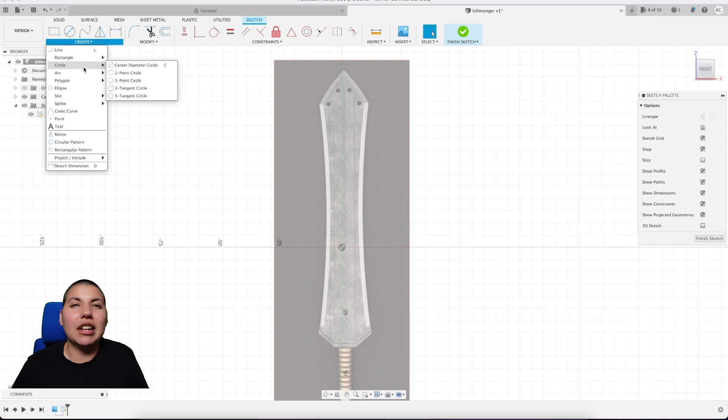For this blade, I'm going to first outline it using an arc, like a 3-point arc or 3-point circle. You can use a spline if you want, it's up to you. I'm only going to do one side, meaning literally 1/4 of it, because I can mirror that side and then mirror the back of it, so that's a lot less work.

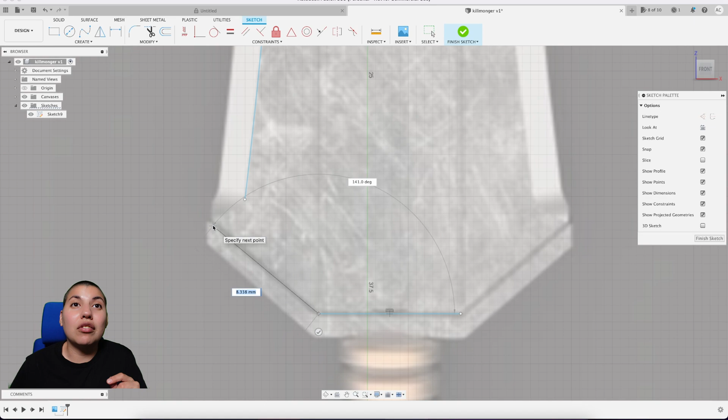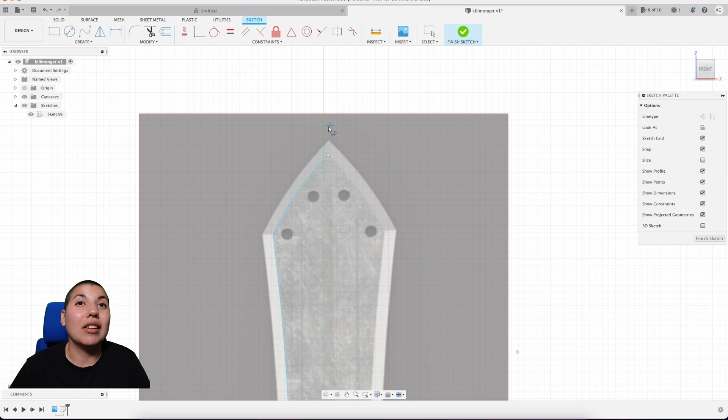Here we're going to be outlining the bottom handle, and if you notice, there's a curvature on the edge of the sword. There's a lot of ways to do it, but for these 2 points, I used the coincident tool, and it took a while to get those points together. To avoid that, you could just have the lines connect like a normal person. I also do a line in between because I like to know where my midway point is, and I need this to be a closed polygon in order to extrude it.

Those edges you see on the sword can be done multiple ways. I'm going to be doing it with drafting, but I'll have a link of another video where the guy used the spline tool or sweeping tool, and it was really cool how he did it, so that'll be in the description. So now we have the polygon done, and it's enclosed.

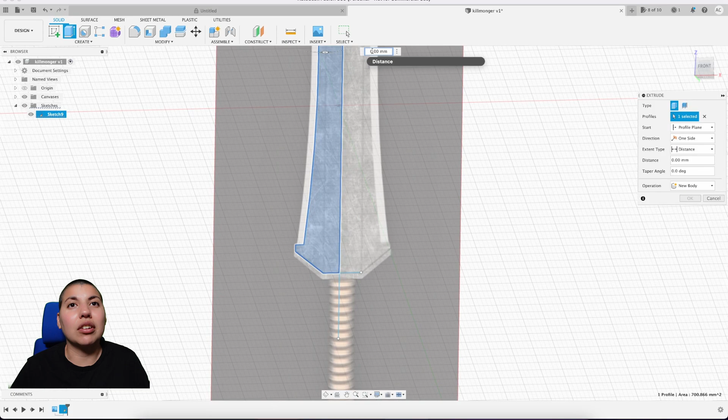Now I'm just going to extrude it, only by one side because that's all that's needed, since I'll be mirroring every single step. Then we're going to draft so I can get that edgy look. Luckily this sword isn't like my previous sword where the whole thing was kind of domey, so I can simply use the draft method on this, and that's pretty neat.

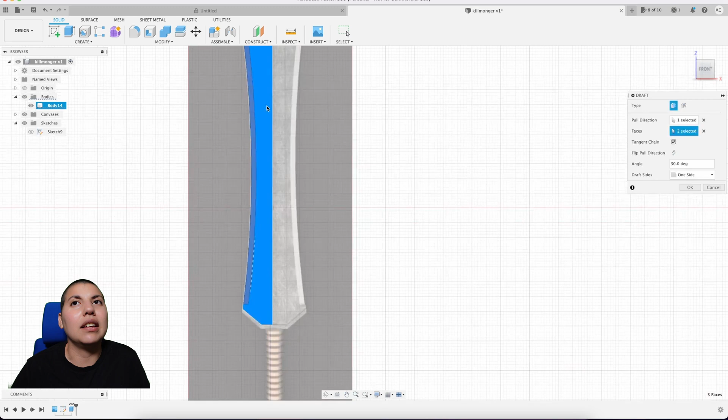Now that that's done, we're going to get into a bit of a tricky part, but to show my mirroring concept, I'm just going to do it now, and voila. See, that's how the front would be done, and then you would just do the back plane for the back side, because mirroring just makes life so much easier.

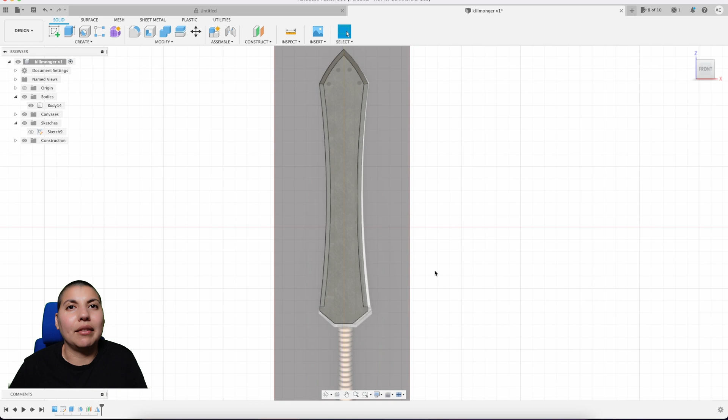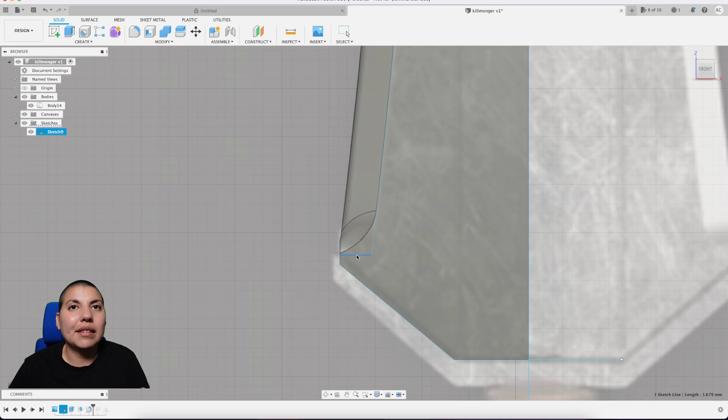So the next step, I thought of a lot of ways of doing this, and to me, doing a fillet was the easiest way. It goes down to whether it's perfectly curved, or like a weird curvy angle. So it's kind of really subjective.

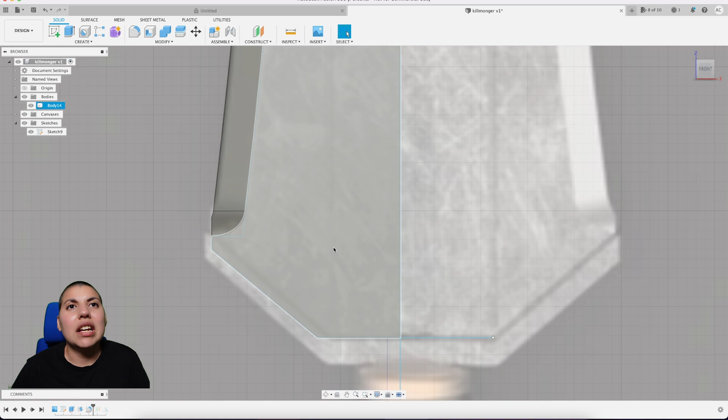I couldn't really find a good picture of this angle of the sword, so I just did a fillet to give it that look. But like I said, I'll have a link down below of a video of how another guy did it, using I believe a sweeping tool, and he cut it, and it was really cool.

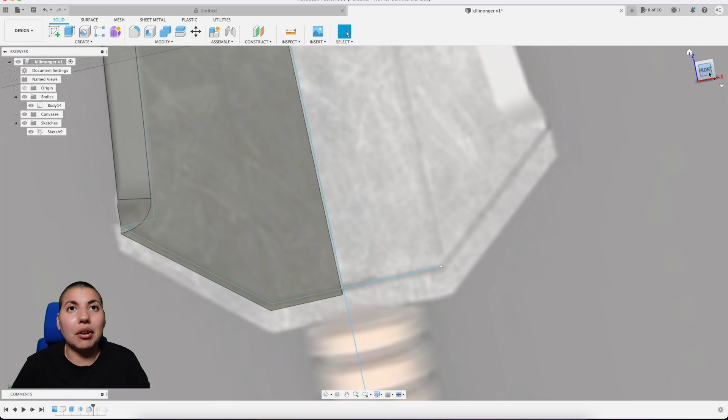I liked it. I was originally doing it like that before, so here it's really hard, like I said, with the details, because I didn't really have the sword, so it was a bit difficult. I didn't have a good image, and I like to see things from the side because I have like weird paranoia - if I do something and change the angle, it's going to look weird.

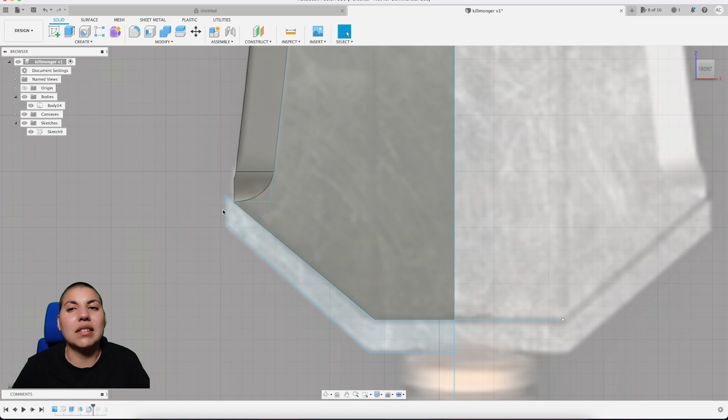Now here we're going to do the outline for the extended handle part of the sword, and then just create some lines. I usually like to do extend when there's a gap between two lines, because sometimes if I do parallel or whatever, it messes up the form. So if I just hit extend, it's going to touch it perfectly, and it solves my problem, so I don't have to worry about doing a line incorrectly.

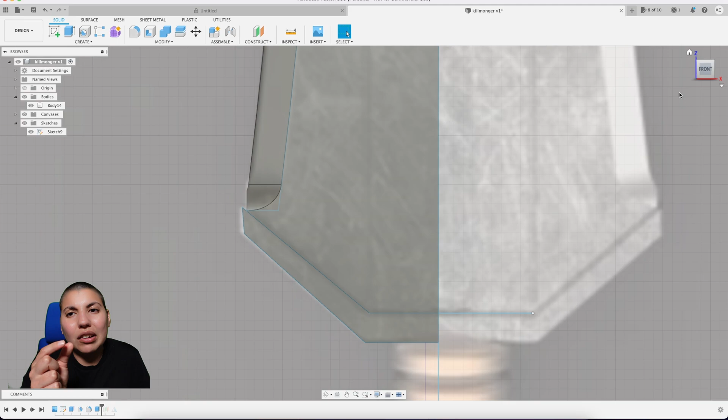After that's done, you want to extrude it. I just extruded a little bit more from the previous extrusion, because it's just a little bit thicker than the previous one. So then we have that, and we're almost done with the sword now. The next thing to do is make the circles. I like to do a construct plane because it makes it safe when you change a face, and then you just do a circle.

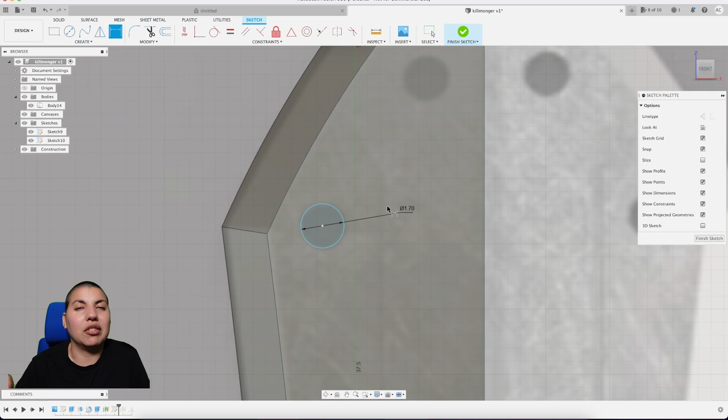In retrospect, I should have done the construct plane on the other side, and I would have saved myself from having to create another construct plane to do the mirroring of the opposite side. But you can do the other side, so you save yourself maybe half a second of time.

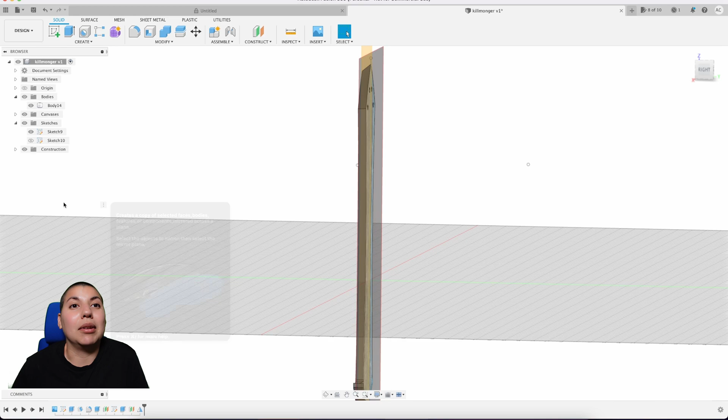But here we have the circles. For some reason, I remember copy and paste was having a problem with this. But after that, you just extrude it, go through the whole thing. To me, it looked like it went through the whole thing. If it didn't, it looked like that to me.

Y'all can correct me in the comments if it's not supposed to go the whole way. But then here's where I would create a construct plane, which I should have done previously, and I do mirror it. And voila, look at that. Now that looks pretty nice.

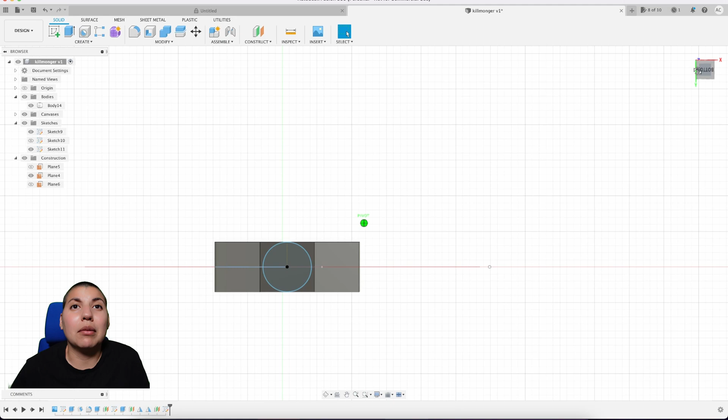Now the next thing to do is we have the handle. So to create the handle, I'll do a construct plane, and then we're going to do a circle at the bottom. Voila, circle, very nice. And you can just do a cylinder and pull it down. Very nice, you pull it down.

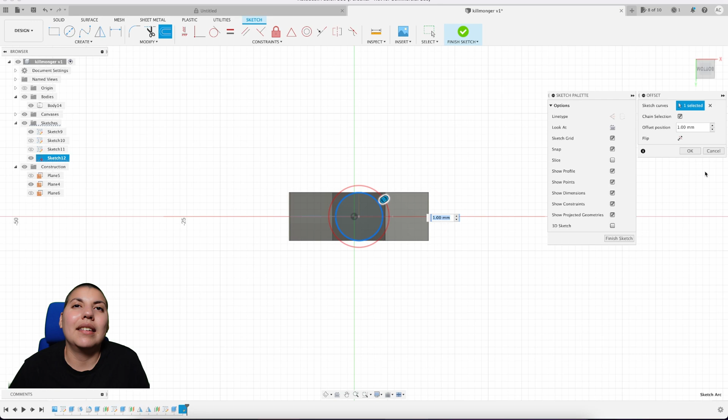And then the next step is we're going to create the bottom base. The bottom base is just like slightly bigger than, well not slightly, it's decently bigger. So everything I kind of eyeball it. Let me see, then we eyeball it.

And then after you eyeball it, you do an offset. When you do an offset, you extrude it. When I extruded it, I realized it was a bit too thin, so I'm just going to pull it out a bit more, you know.

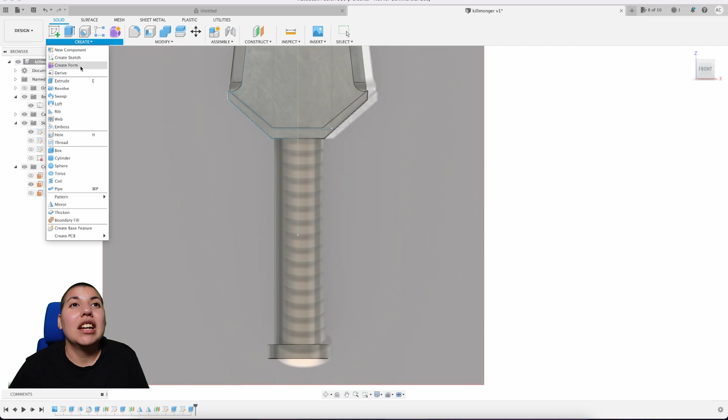And then after that, we're going to do a coil. I think this might be my second time using this tool. I think this is a coil tool, I don't remember. And so you just create a circle, and I'm kind of learning as I do this.

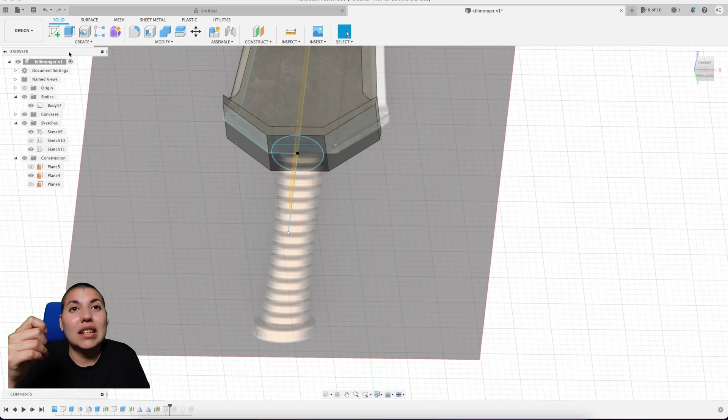And so I do a circle, and I was like, what, this isn't right. I guess I learned I have to do the circle from the top, because you can only go in one direction, I guess. If you go in two directions, I didn't know that, but I assumed you could only go down. I also didn't really look at how people use the tool, I just kind of winged it.

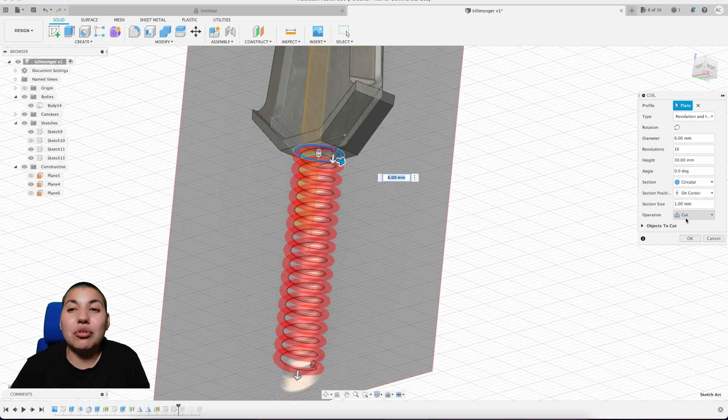So I just created a circle and kind of did a little offset. And then what I noticed here with the parameters, I guess, on the side, is you can also change if the circle is the inner, outer, or center line, which I didn't know. I have mine set to the center line, and right now I have it in circular mode because the coil is circular.

But you can also make it a square, which I did not know also. You could also make the coil cut the handle if you wanted to, if that's how the design's supposed to look. To me, I liked it more as a joined body, so I just had it join the body, and then I would play with it and see what I liked visually and what matched the sword better and whatnot. It was a bit hard.

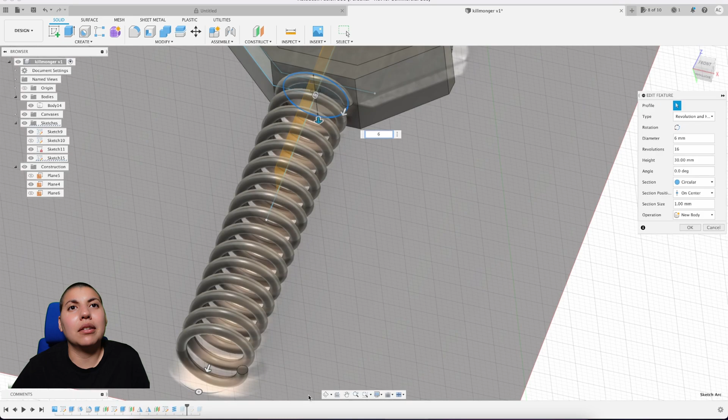I couldn't really find a good image. You'd think there'd be really good images, but the best images I could find were on these little figurine toys, and I had to expand the image to see what it looked like. So yeah, let me see what I do next.

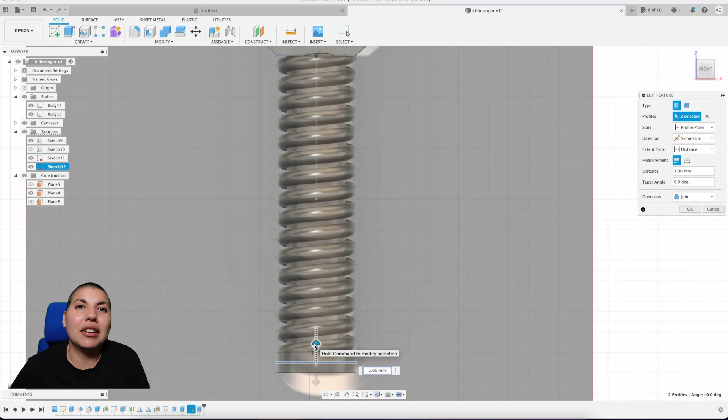I didn't realize it finished like that. Oh well, I guess that part on the bottom is kind of cut off on the finish. But luckily it goes straight into, see? Because I'm lazy, I was like that piece is sticking out, I'm just going to extrude the handle piece going up instead of it just going down, so you can't really see how that piece is sticking out.

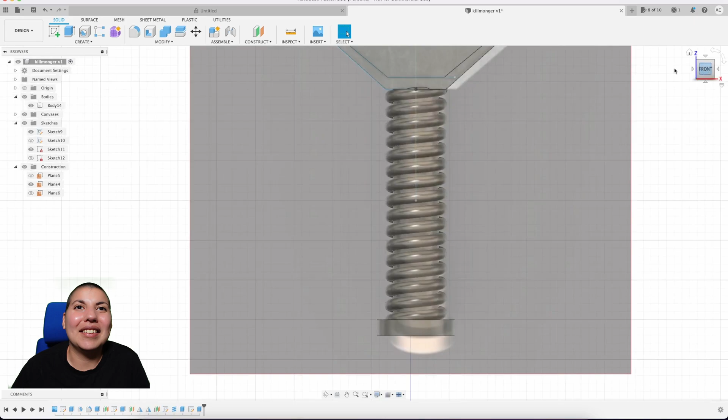I'll circle what I was talking about, what I just noticed what I did. So there we go, we got the handle nice and cute. And then this is where, on the bottom piece of the handle, I was able to do a cheat sheet by extending the handle piece to go up so it would absorb the coil and join the body so you don't see the finish.

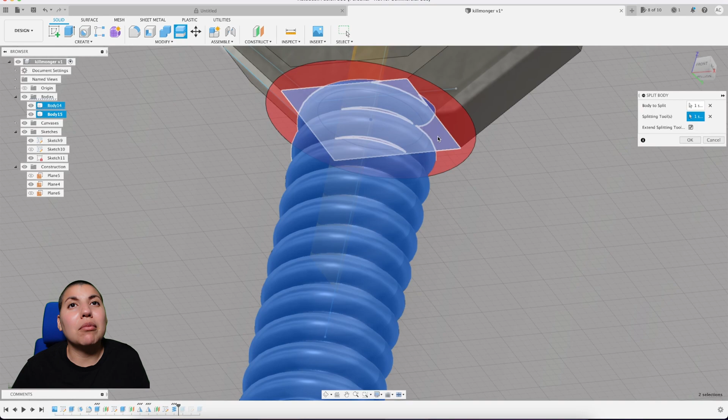But here, I can't really do a cheat sheet. Well, I could. And so what I'm going to be doing is I'm going to take that bottom face and just make it split the coil so it can just split it.

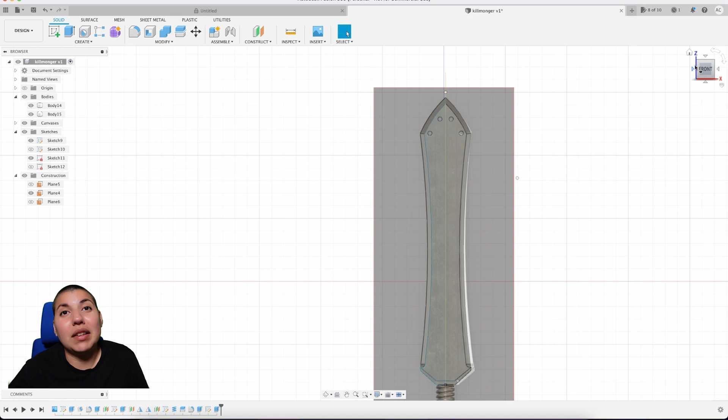Either way, so now here we have, we're going to do what I call the Fang Piece of the sword, and I'm going to do this by lofting. So I'm going to create a construction plane here on the bottom of the edge, and I'm going to take the edge piece that sticks out, and then the piece of the sword that sticks out, which is, I guess you call the two faces, whatnot. That makes any sense. And I'm going to take how that plane intersects or projects onto the plane that's perpendicular with it.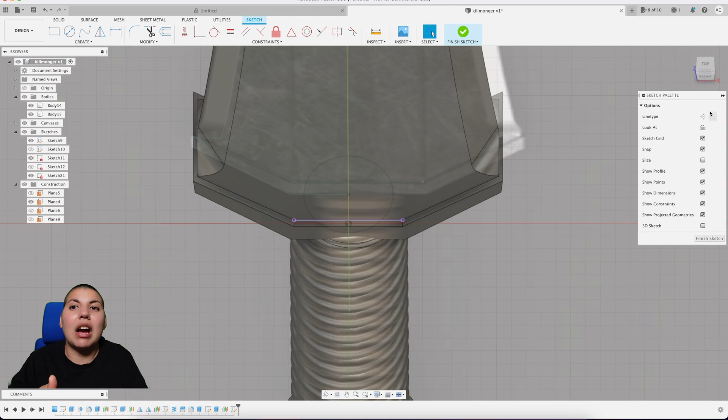So that shows me how far I can stick out and how far the sword is, because the outer line is where the edge piece is, and the inner line is where the sword is.

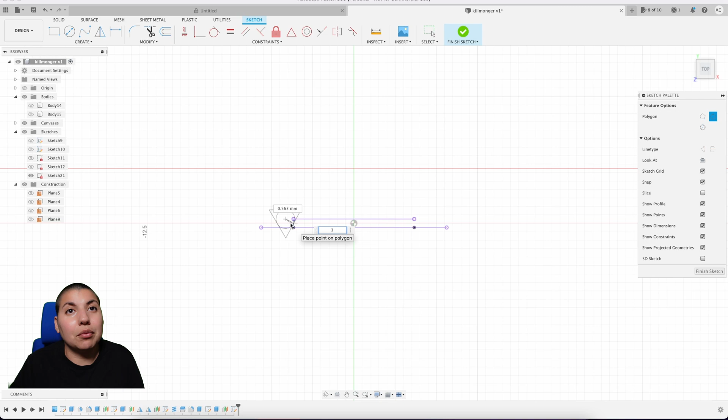So here I'm going to create triangles. I only need to create two, because there's only two different sizes. The small size I can just use a pattern to duplicate to the other side, and the big size only happens once. So the idea is I'm going to create these triangles, and then create planes above them.

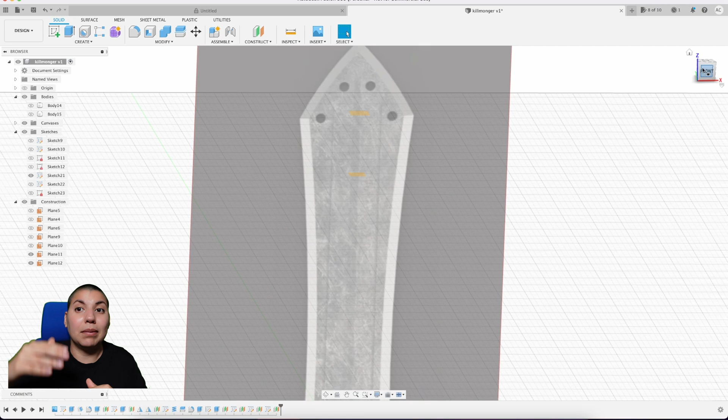Only the first two planes will matter. After that, they're just going to be projections of the previous planes. The first plane and the last plane will be in the same spot, and then there's going to be two planes in the middle where the triangles will be matching, because that gives you that fang look that goes on top of the sword.

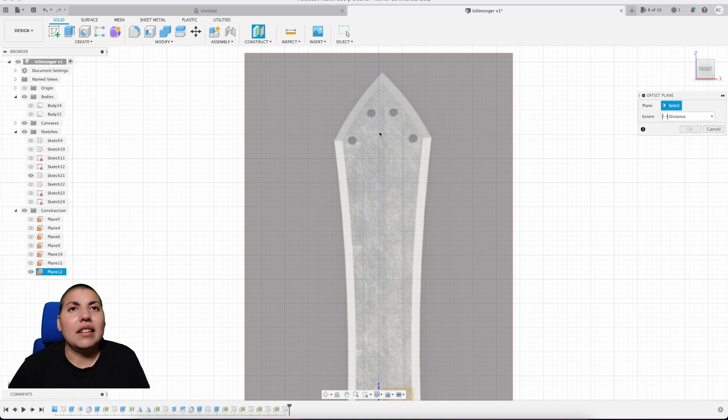This may not make sense, I can't really illustrate it, but you'll see it as I go through this process. That's exactly what I'm doing. I usually don't move the items until the loft is done, because it's hard for me to visualize it sometimes, so I just do my planes.

After the planes are done is when I'll start the lofting, and once the lofting is done is when I move them, because it just makes it easier.

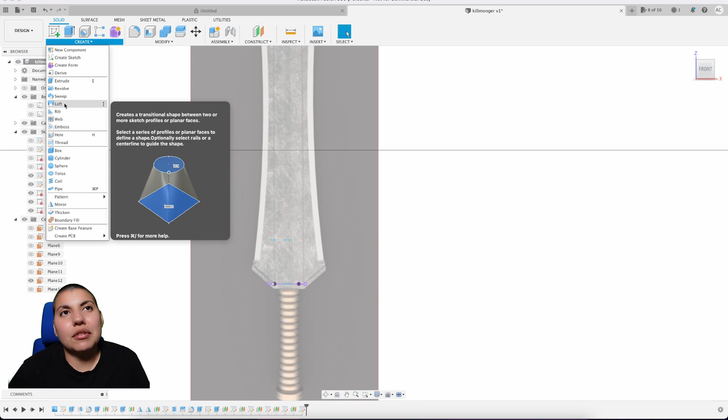I did look at a lot of photos for this one, because some of the things had these fang pieces touching the edge of the sword, and some of them had them where they weren't touching the edge. I try to get as accurate as I can, but it's kind of hard because I don't know.

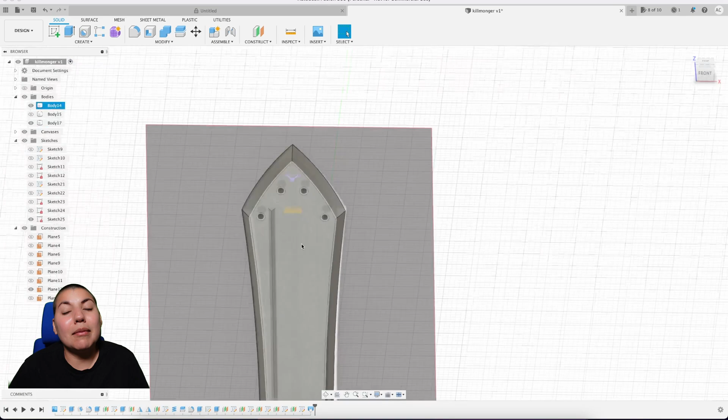Some of this stuff is hard for me to see. Some of them, it actually looked like the sword was engraved, not like a pointy piece, so that was different. But most of them looked like it had a triangle piece, so that's why I went with that.

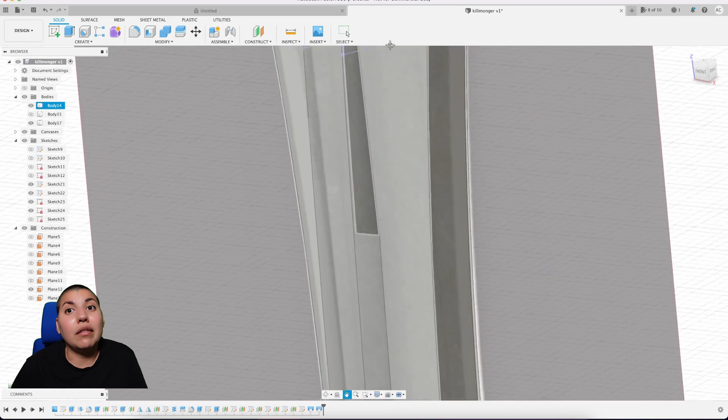But you could also do the opposite if it was engraved, because you could just cut instead of creating an object. It'd be the same concept. Or you could do just a straight sweep and make it the same size.

So here, as you can see, the last two ones were just projections of the previous. An easy way to remember is last goes with first, and middles go with middle.

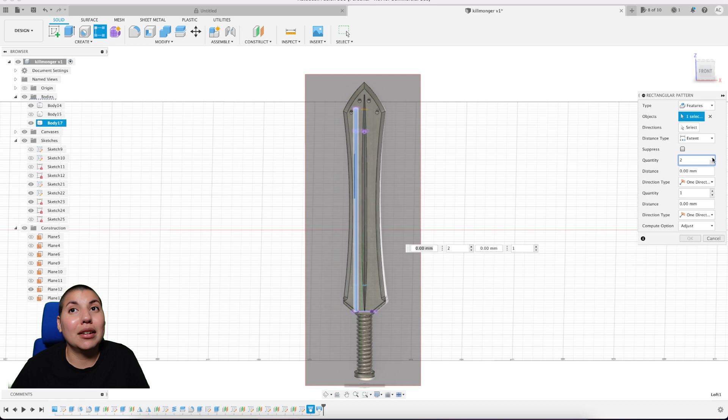Now that that's done, by pattern you can replicate something. Since this is a straight line, you just do the rectangular one.

I kind of just like, when I move them, I'm thinking how far is this piece from this piece, and I just move it. And then voila, look how nice that looks.

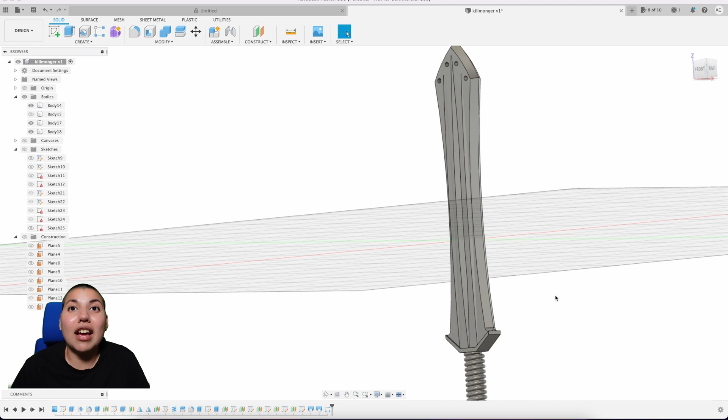Now that that's done, all you gotta do is mirror that to the back. I think I'm doing this because I never created a construct plane, so I had nothing really to mirror it to.

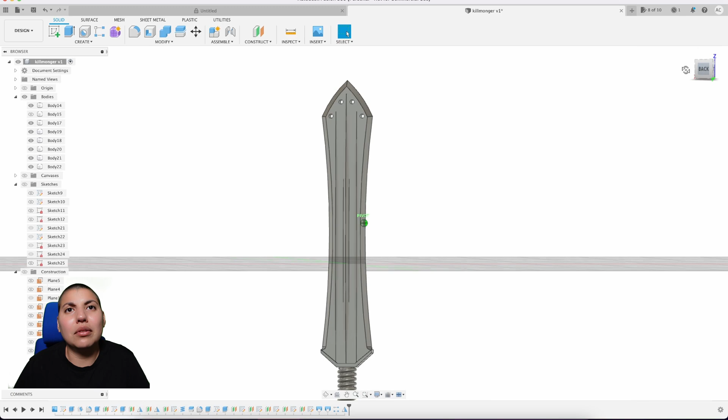In retrospect, because it was already joined, since when I mirrored it I joined the bodies, there was no middle plane I could use. So I actually had to go and create a construct plane and mirror the features. And then there's your sword.

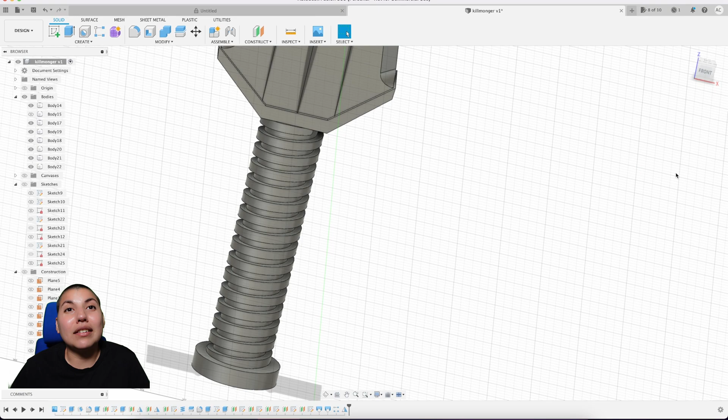Actually no, too early. I forgot that I said earlier that I made them into squares. You could keep them circular, but when I looked at another photo, it was clear as day that they were more rectangular, and I was just like, that looks way better.

And that's when I looked at this fillet, and I was just like, I don't like this. I think it looked cool if it was meant to be like a necklace, like you see when they have that thing here, and I think that's cool, or a bracelet. But that's not it. So I'm just gonna go here.

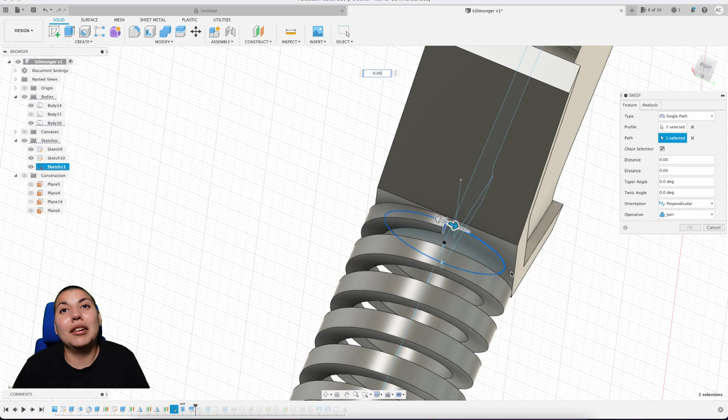I'm gonna do exactly what I did before and failed miserably. I did fillet because I was lazy, and I was like, that will do.

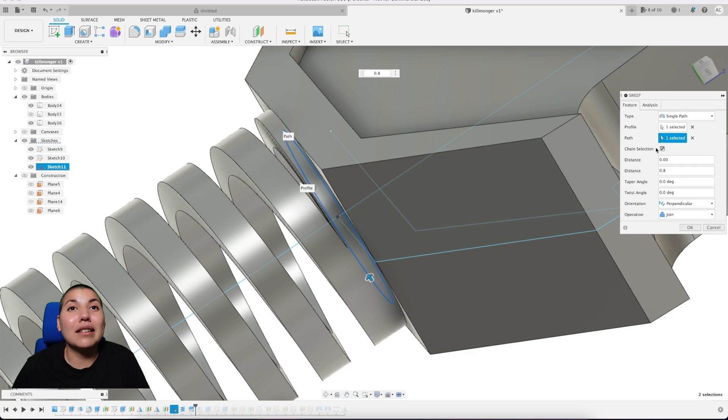I always struggle using the sweep tool. I always go... but I think it's because, I said the mouse, but I think lately I've been using the touchpad a lot, and using the touchpad makes modeling a lot harder. I just use it because I'm lazy and it's the closest thing near me, and I probably don't have my mouse. I should probably be using the mouse more often.

But that's the sword, just gotta show that cylinder. I gotta delete the fillet. Don't forget to delete the fillet because the fillet on that looks nasty. But there's the sword.